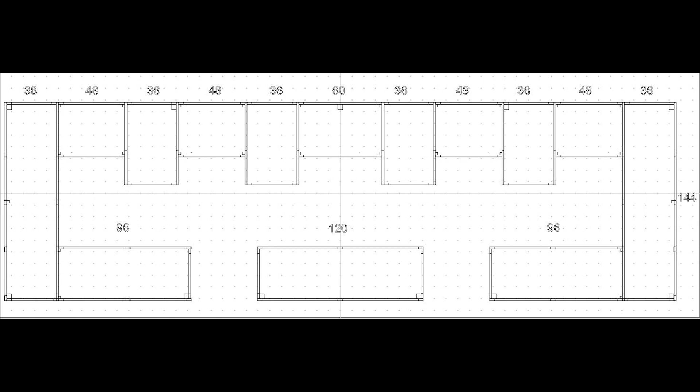But then I thought, wow, I can also use VCarve to design the actual boxes, the pieces of wood I need, the number of screws, the size of the metal. I can design each individual piece in VCarve. So that's what I did here.

And then that helped me make up the material list of what I needed and made the ordering of everything I needed to complete the project very simple.

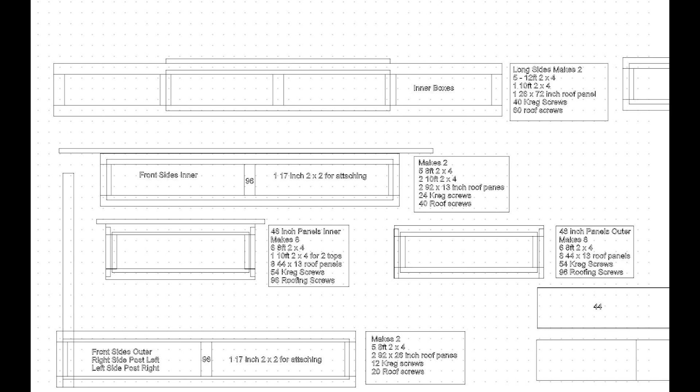So the plan here is to take some 12-foot 2x4s, lay them on the ground, lay a sheet of roofing on top of them, and then cut them in half down the middle lengthwise. And I'll tell you how we're going to do that.

So I have watched other YouTube videos where they make metal-sided raised bed planter boxes, and when they cut the metal, there's various ways that they've been cutting it. I've seen people use angle grinders, which sends sparks flying everywhere. I've seen people using just regular tin snips, but that takes forever.

And since I'm going to be cutting 10 panels that are 12 feet long in half, I looked for a better solution, and by God, I found one.

So I've been a big fan of DeWalt tools for a long time, and when I found this DeWalt attachment for the drill that will shear 18 gauge metal for only $42, I just went and bought it. And we're going to try it out on my roofing next and just see how the whole process goes. But what a fantastic find if this works.

See, it works just like that.

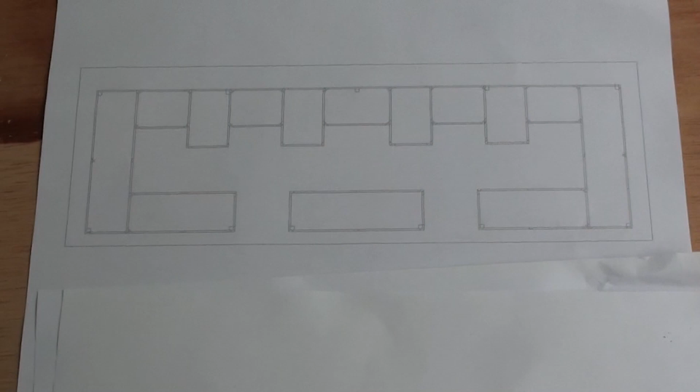So as I showed you earlier, this is the layout, the footprint of the planter garden. We're going to start by doing these outside frames, and then we'll do the inside frame and connect them and do this first box.

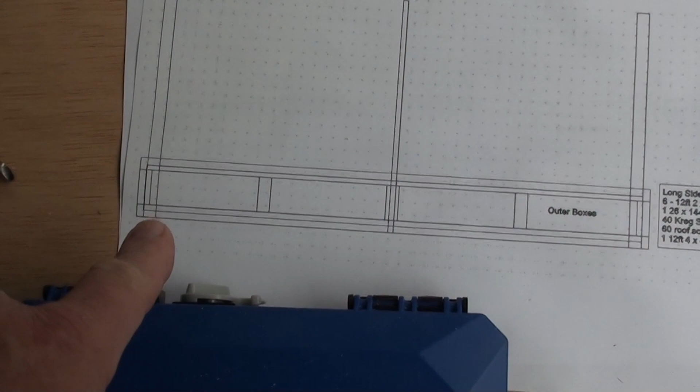Now, when I blew up my material list, this is what it says, how we're going to do it. But I'm making one change - instead of doing 2x4s on the ends, I'm going to be using 2x6s, and it'll be apparent later why I changed my mind.

So my driveway being fairly flat, I'm going to lay out all the pieces and cut the small 2x4s and 2x6s that hold everything together. Then we're going to be using pocket screws, 2.5-inch outdoor pocket screws like this, to hold everything together.

So let's get started. I'm going to be cutting 11-inch pieces to go in between the top and bottom pieces, so I set a stop block to make all the pieces the same, plus I put a piece of blue tape there, so when I change the size I'm cutting, I can always come back to this exact size when cutting more small pieces. So let's get started.

Now we're going to put the holes for the pocket screws into each end of these boards.

So now we need to measure where we want these supports to be. I want one in the middle, one 3 feet in from each side, and I want the 2x6s on the ends. So we're going to mark those now.

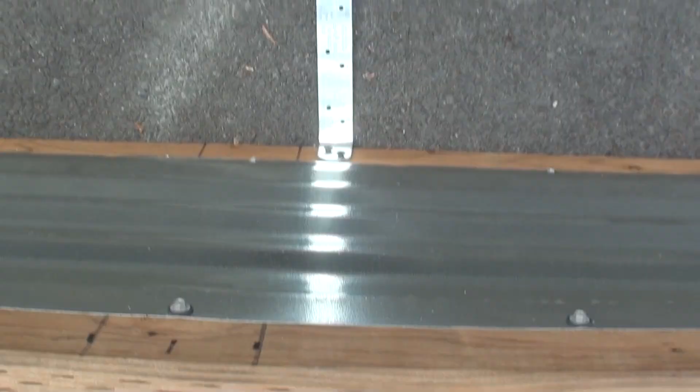I was a little nervous about the dirt pushing the sides out and bowing at the bottom, so I put a Simpson Strong-Tie strap 36 inches wide from side to side, so that should keep it from bowing. And if I need to do it at the top here, I can just put a 2x4 in.

So that's it for today.